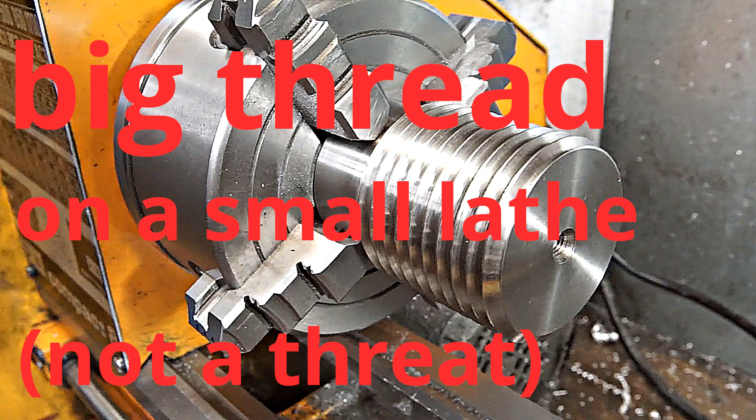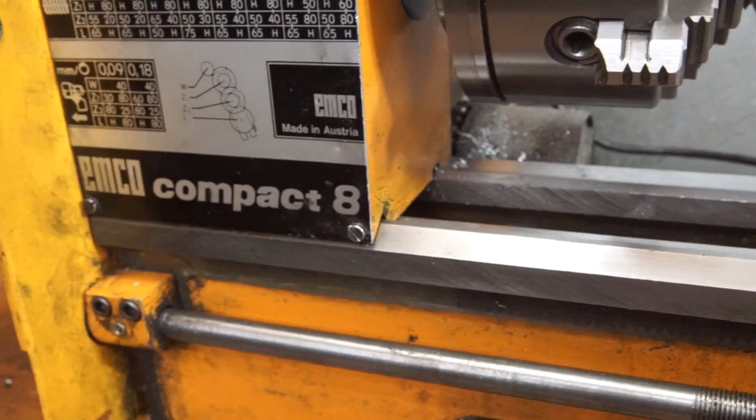Some time ago I had to cut a fairly large thread in steel on my small lathe. It was a copy of a DIN 800 spindle nose with a pitch of 5.5 millimeters. A suitable change wheel combination was quickly found, but the usual thread cutting methods were not employable on the small machine due to the required width of the cuts.

In this video I will present a method which allows cutting threads of any size, even on mini-lathes, at least in theory. Let's start with a little bit of boring theory.

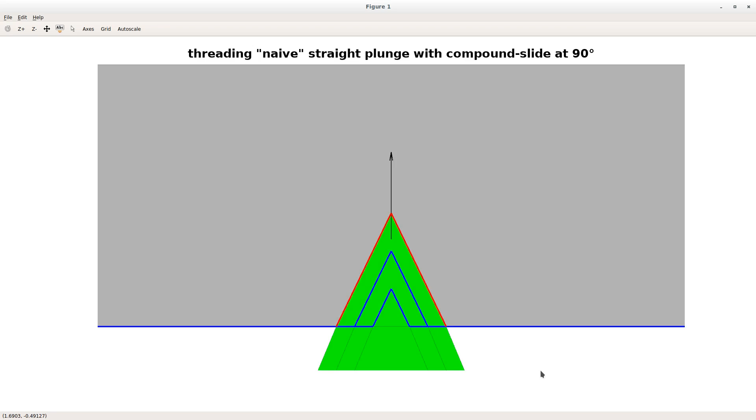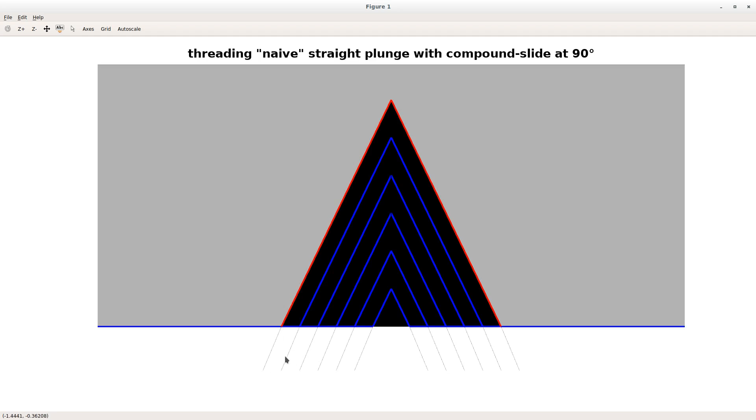For cutting threads, you can of course simply feed perpendicular to the axis of the workpiece between the individual passes, either with the cross slide or with the compound slide rotated by 90 degrees. The red line shows the required cutting width, which is more than twice the depth of the thread. Even with minimal infeeds, you will soon reach the limits of a small machine. So far, so familiar.

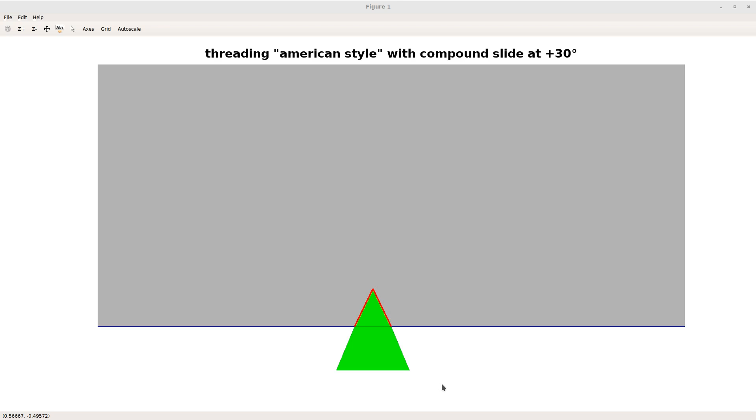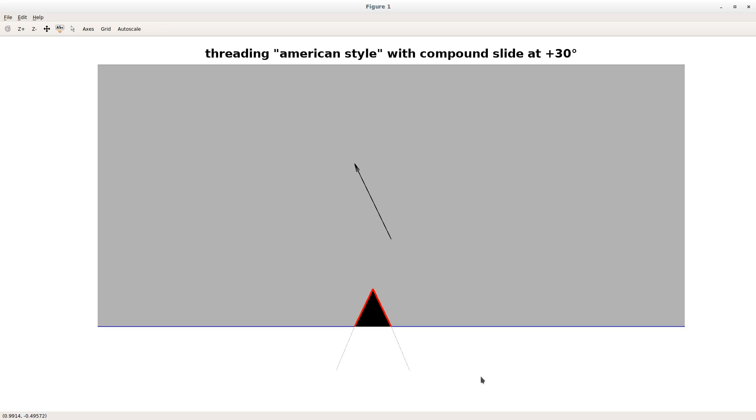The problem can at least be reduced if the cutter is not fed perpendicular to the axis of rotation, but at 30 degrees parallel to one of the cutting edges of the tool. In the Anglo-American world, the compound slide is often rotated accordingly. The infeed then takes place exclusively with the compound slide. The diagram shows that the chip width can be roughly halved using this method. Again, so far so familiar.

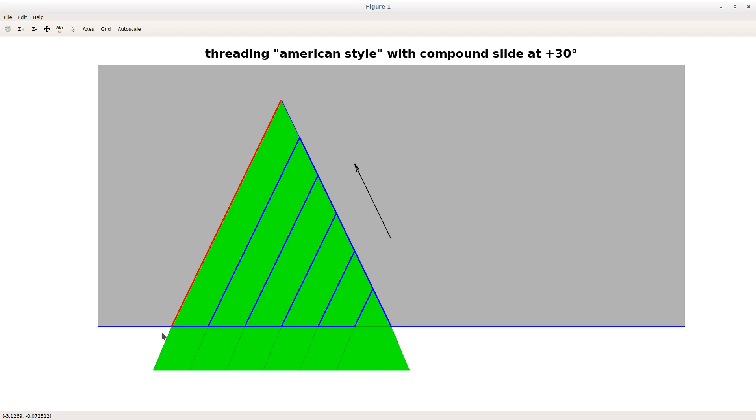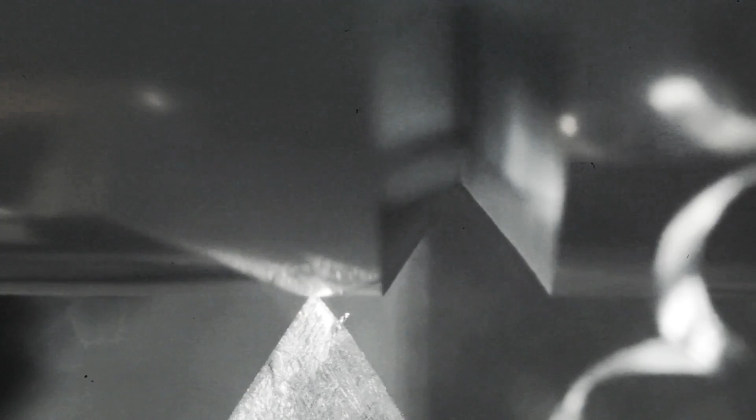However, this procedure also has its limits due to the cutting width increasing proportional to the thread depth. But there is a simple solution. Let us briefly consider the production of a deep V-shaped groove. Here you can first simply plunge in vertically and then peel off one of the flanks with the compound slide set to a 30-degree angle. Theoretically, this can be done to any depth with small cutting widths.

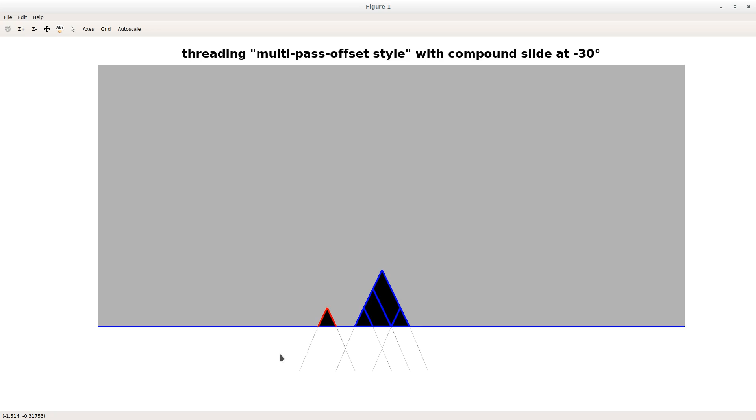Of course, continuous infeed is not possible when cutting threads. Here, step-by-step infeed is required between the individual passes. Thus, we start with one or more cuts with perpendicular infeed. The tool is then moved in a longitudinal direction. Starting from this position, the compound slide is used to feed between the individual passes. This is repeated until the desired thread depth is reached.

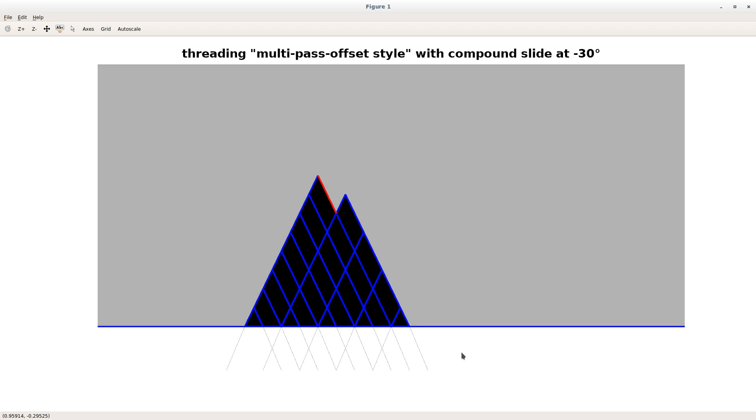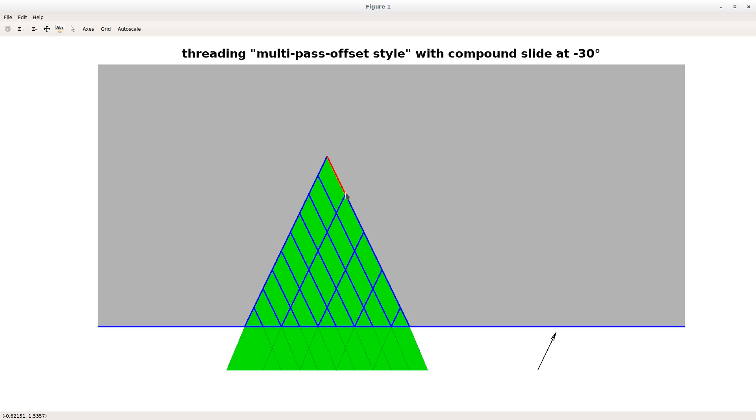The section highlighted in red shows that the cutting width does not increase with the thread depth, but only depends on the offset in the longitudinal direction. So, enough talk. Let's make some chips and take a look how this works in practice.

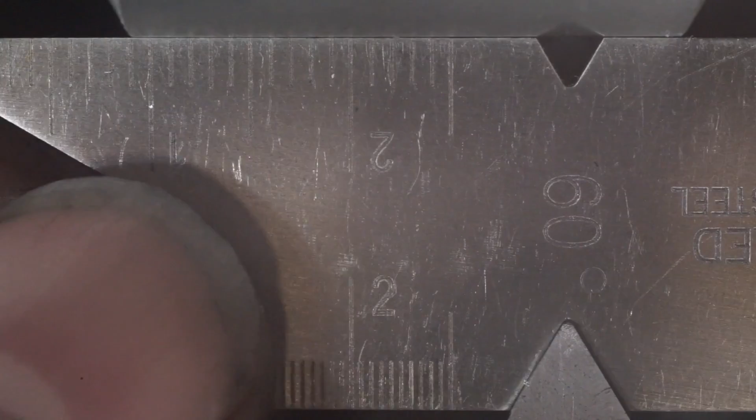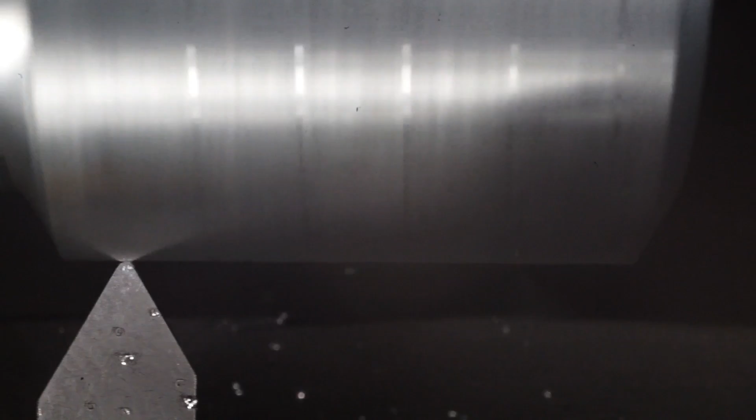Firstly, the top slide is set to minus 30 degrees. For the following demonstration, I will use a piece of aluminium, which I have already set up here. I use a single point screw cutting tool ground from high-speed steel, which I align with the fishtail gauge. I start with the usual scratch pass to check the thread pitch, in this case 4.5 millimeters. The first passes are simply cut with perpendicular infeed, so nothing special up to this point.

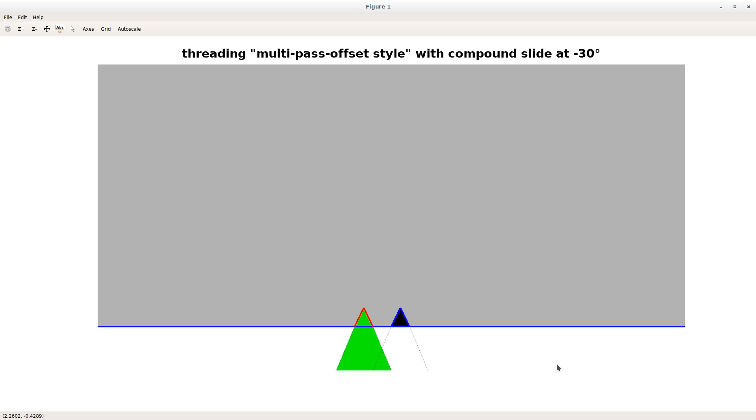The next step is slightly more complex, as the cutter has to be offset to the left in the longitudinal direction. We cannot use the carriage, as this is in engagement with the lead screw during thread cutting. I will now use a test piece to demonstrate how this longitudinal offset can be achieved by a combination of feeds on the cross and compound slide.

I start with a scratch pass, pull back the cross slide, return to the starting position and re-zero the cross slide. Now the actual longitudinal offset takes place. In the first step, I feed the cross slide in by about twice the desired longitudinal offset, in this example by 2 mm. In the second step, the compound slide is moved back beyond the zero line.

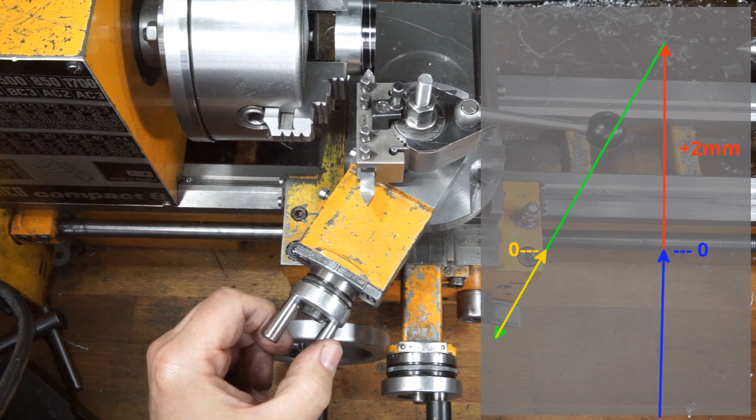The carriage is now moved back into the area of the workpiece, and the compound slide is advanced so far that the tool just touches the workpiece. This sets the desired longitudinal offset. The offset can be calculated as tangent of 30 degrees times the cross feed. This should give us 1.15 millimeters.

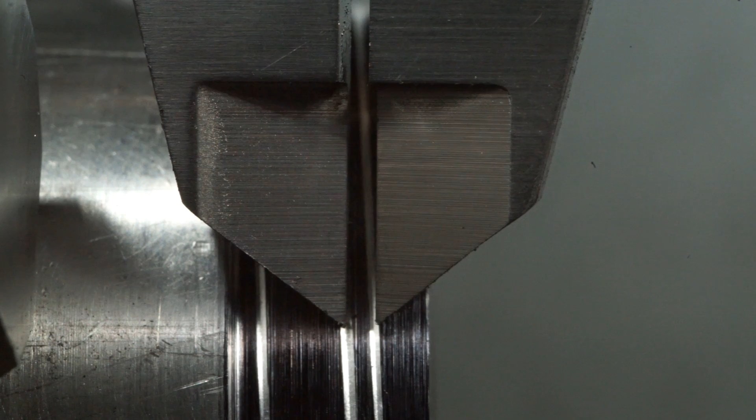We check this with another scratch pass. So cross slide back, carriage back to the starting position, cross slide back to zero, minimal infeed on the compound slide, and scratch pass. The caliper gauge is used to verify that the two scratch marks are indeed offset by the expected 1.15 millimeters.

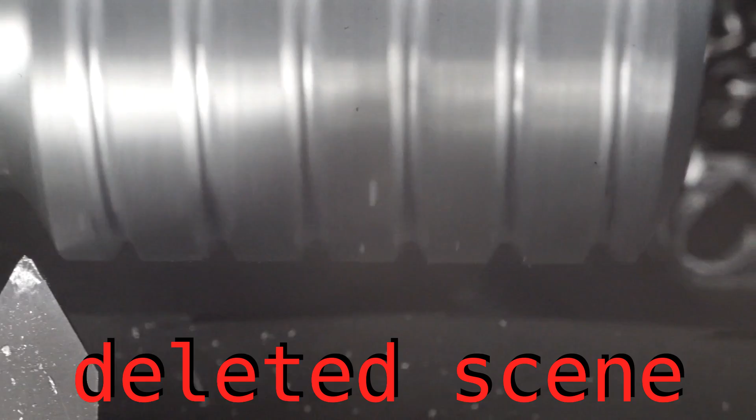Back to our actual workpiece. I messed up a bit here, so please forget this scene. But now, cross slide to zero. Feed in the cross slide. Move the compound slide back. Zero the compound slide.

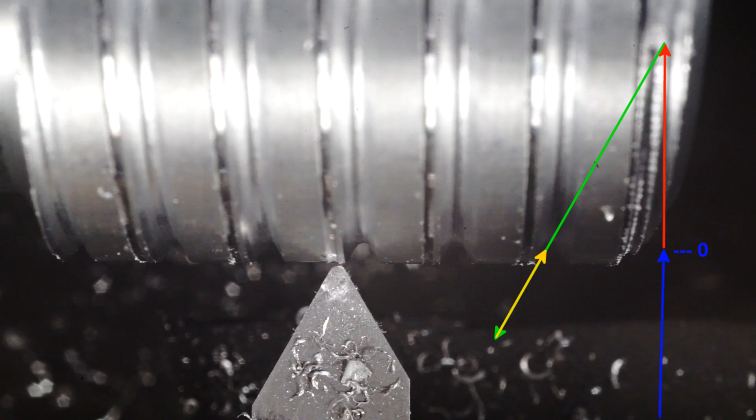For a test run, feed in the compound slide a little bit and try a scratch pass. As I made a mess before, it's hard to tell, but it looks okay. So I feed in on the compound slide and cut the next pass. This is now repeated several times, and after a few passes you can see that something like a second thread evolves.

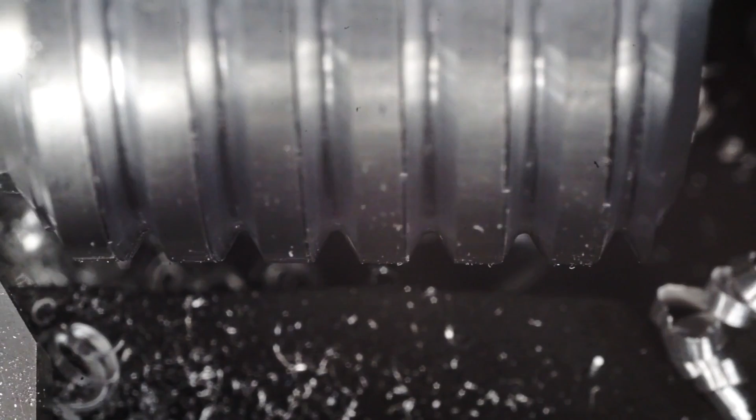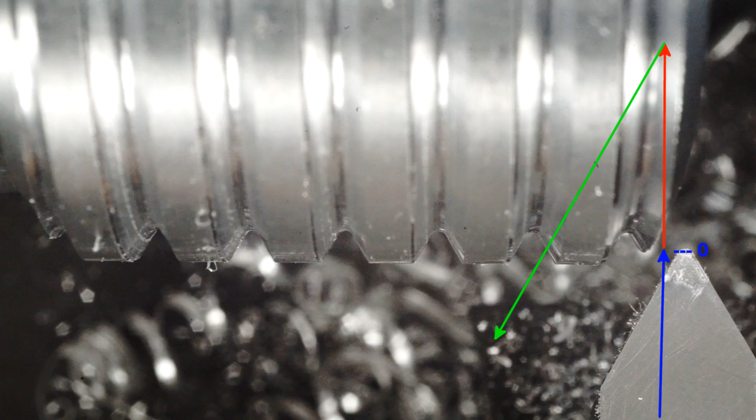After the first longitudinal offset, the thread is now cut to the maximum depth and another longitudinal offset is performed. So again, advance the cross slide by 2 mm. Move the compound slide back beyond the 0 line. Zero the compound slide on the workpiece. Feed minimally. And scratch pass. The new thread is clearly recognizable.

The entire process is now repeated for the new longitudinal position. Admittedly, the method is extremely time-consuming and requires a certain amount of concentration at first. On the other hand, it makes it possible to produce threads that would otherwise be almost impossible to make on small lathes.

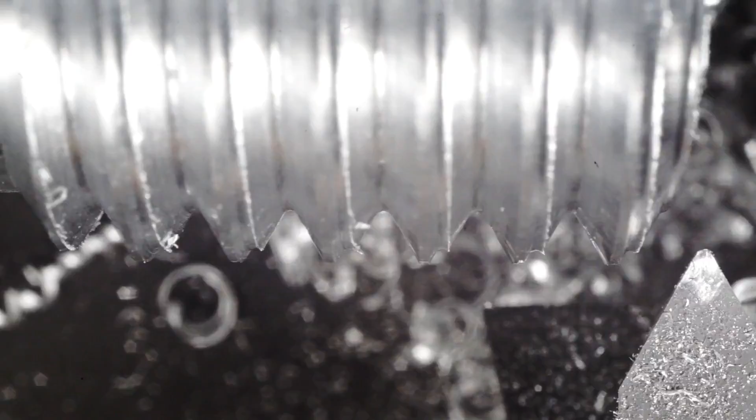Now it's time for another longitudinal offset. Adjust the cross slide by 2 mm. Move the compound slide back over the 0 line. Zero the compound slide on the workpiece. And so on. Only a smaller step size is required for the last longitudinal offset. The resulting smaller cutting width then allows larger infeeds on the compound slide.

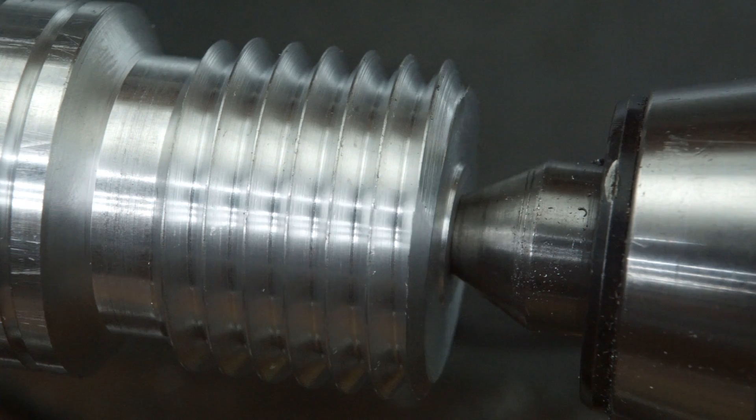By the way, I do not claim to have invented this method. A similar procedure is described, for example, in the book Spindles from the Workshop Practice series. The efforts are finally rewarded by a quite usable thread. I would be delighted if this little trick would be of use to small lathe owners.